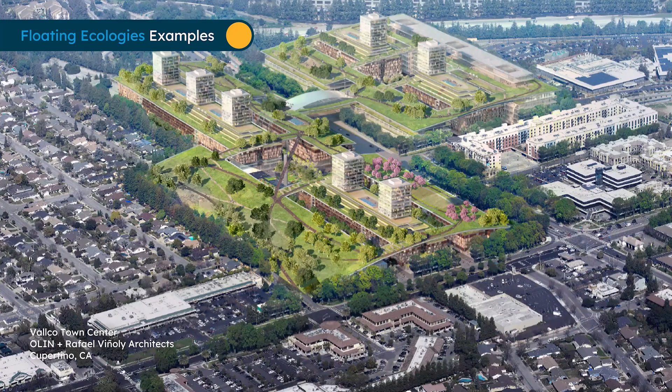And we're seeing this already in many major projects across the globe, for places like New York and the High Line, or large green roof proposals.

And huge urban greening and green corridor initiatives. And so naturally I thought, how do I do this with LandKit?

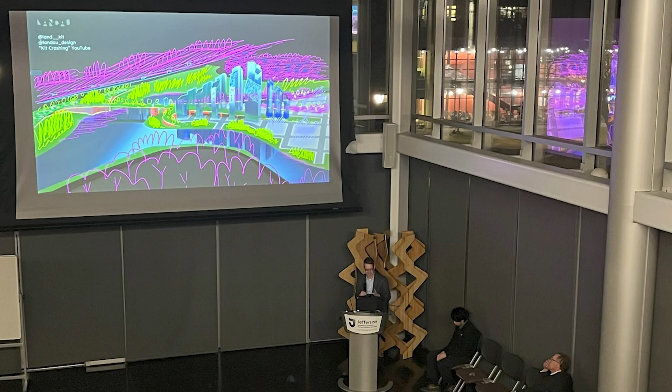And just as I was having that thought, I also was invited to give a lecture at Jefferson University, a very quick lecture, mind you, but I wanted to propose this idea as part of this panel that I was on with some esteemed architects. So anyways, that was really great, and I enjoyed meeting everyone.

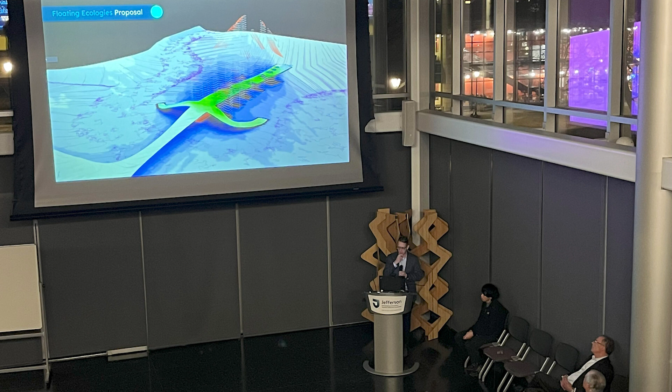But the proposal was something that I'm happy I did in place of just talking about our work. I hope you enjoyed the demo we give on floating ecologies and massing greening into urban areas.

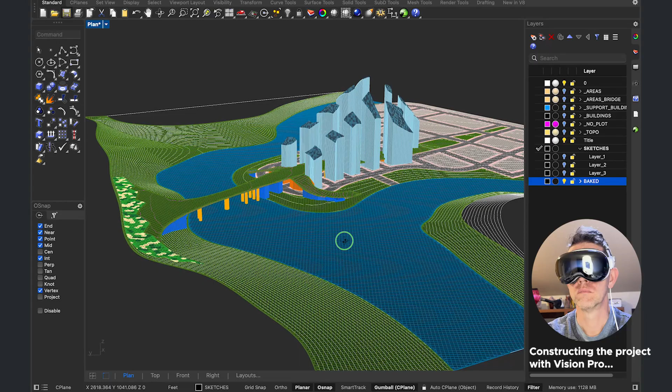This is an interesting example of a set of ideas that came out of a talk that I gave at Jefferson University a few weeks ago with the Council for Tall Buildings, with one of the partners of Moshe Safdie, Jaron. What I wanted to talk about was how do landscapes populate large cities?

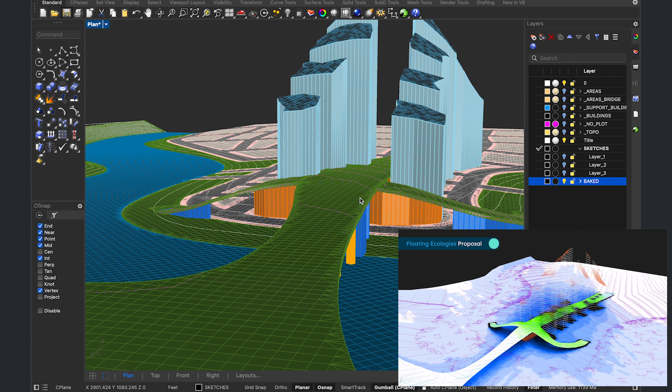I started thinking about how can we get decks of green flowing through the city in reasonable ways, and I wanted to spatialize that. The thesis is that we need this, obviously, because we need better and more ambitious green in our cities. How does that work? And if we're going to go taller with buildings, how do we go taller with landscapes?

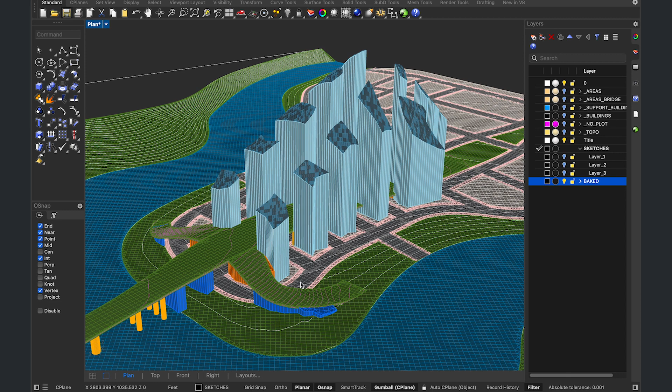That may be the right idea or not, but I had this idea or vision of how we could use LandKit to expand and build in this way.

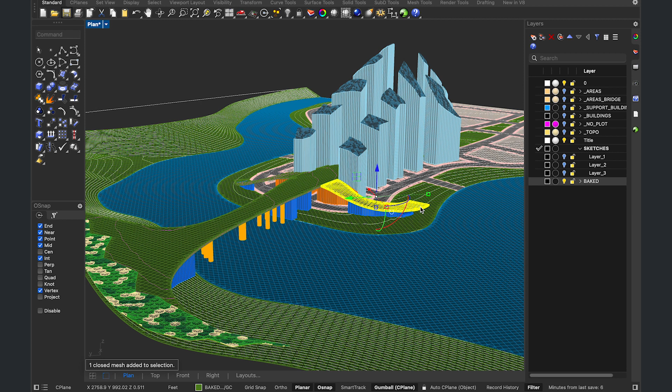So this is actually a baked version of the site. I have each element: this is the kind of green deck, these kind of green bridges that come down, and then these sort of supporting buildings.

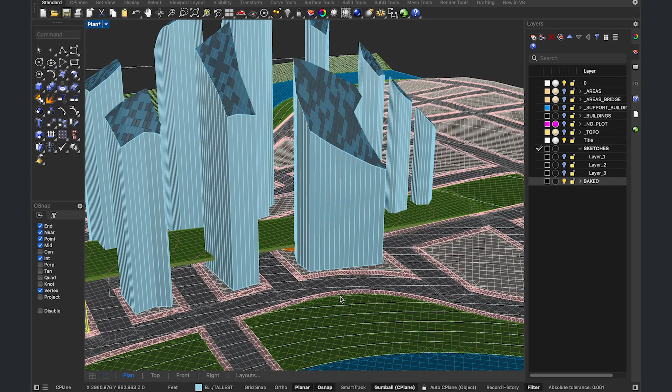We have our kind of garden of towers here that even in this case are kind of inside of the garden as a conceptual idea. But this whole city was an imagined thing that I put together.

So let me show you what we did with Grasshopper. If I swipe over here to the Grasshopper and I zoom out, believe it or not, this is the whole Grasshopper definition. So if I zoom in here, what do we have happening first?

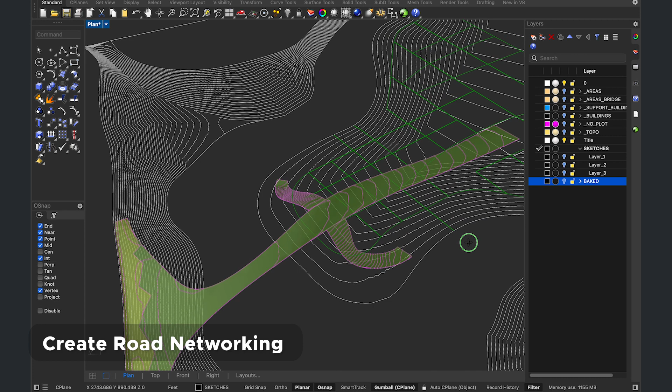First, we start with the roads. I created a road network using a set of line work you can see here, and that's under roads in no plot, I believe. If I select all these, I created a road network, and that road network is, again, just imagined.

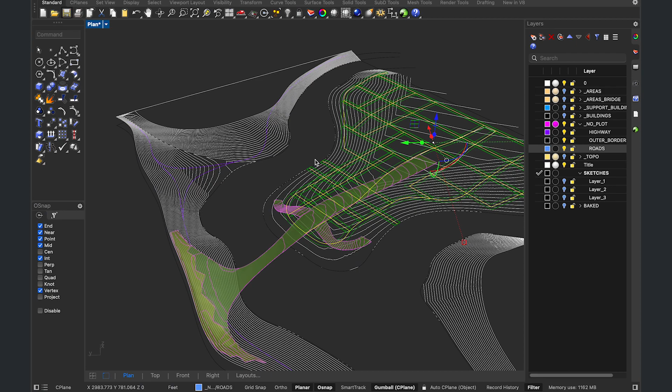But I was able to take those road networks and create pipes along them and intersect those with a plane. And if I preview that, we can see that there's a set of roads in the green there around the yellow that create a set of roads.

And then I randomly shifted them up and down for collaging purposes, which I've actually integrated this into LandKit, and we don't need this anymore. But whenever roads are all at the same exact level, this is going to kind of force the hand and make them at one level or the other.

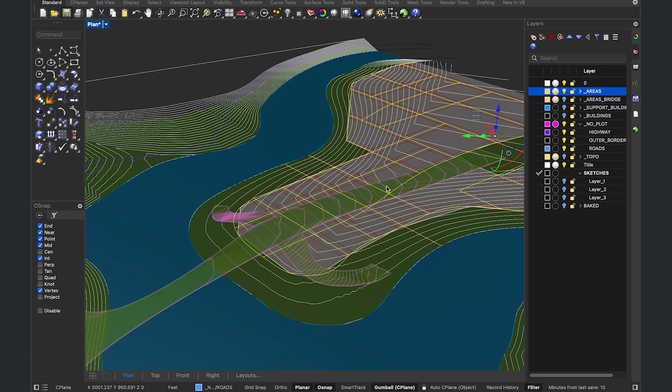The other thing I did was to take a set of other geometries, and let me show this. So under areas, if I preview those, these are all the underlying surfaces. And I'll just turn this off.

If I select all of these, select sublayer objects, you can see that I have my big green moves, my big gray, and water, just as again a conceptual model.

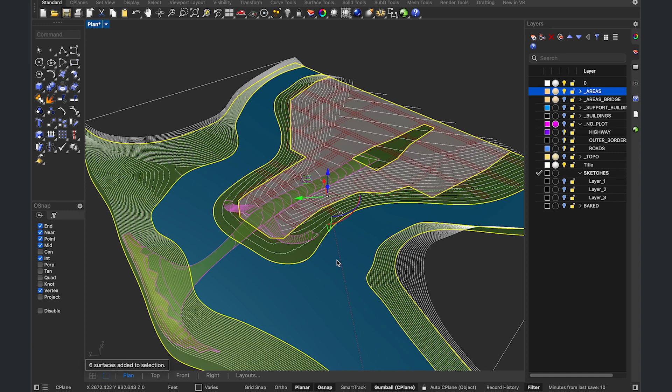But then all of the roads layer in on top of that, and the roads, if you'll notice, they're at a 2, and so they're slightly higher than everything here. And then I think I had sidewalks as well.

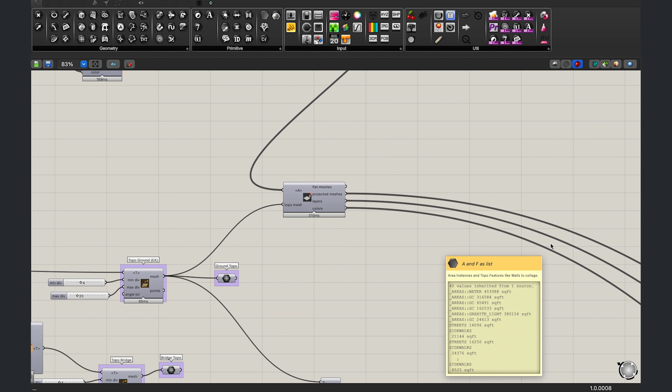So ultimately what you end up seeing from that, I can preview that. Let's actually just do a preview here. And I'm just going to preview these geometry surfaces and hide these areas. So you can see this is everything, and I'm going to turn off some of this.

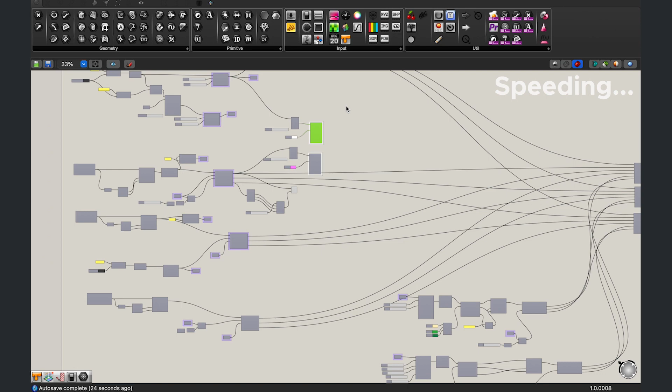There we go. You can see the road network and the sidewalks all layered in on top of these other things, which is kind of interesting because all I need to do in order to change a road is, well, first of all, turn on that layer and simply move that layer over like this, and suddenly it updates the layout of everything, or of all these trims and everything.

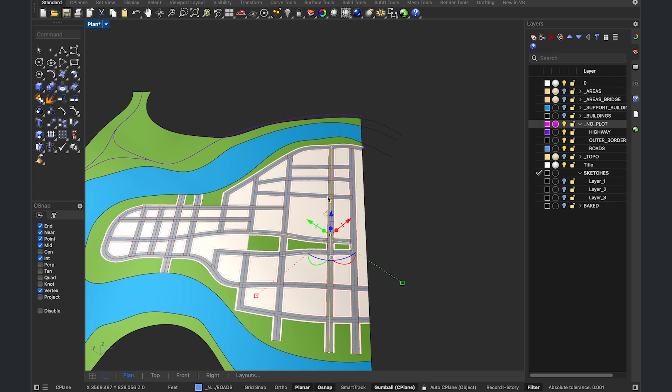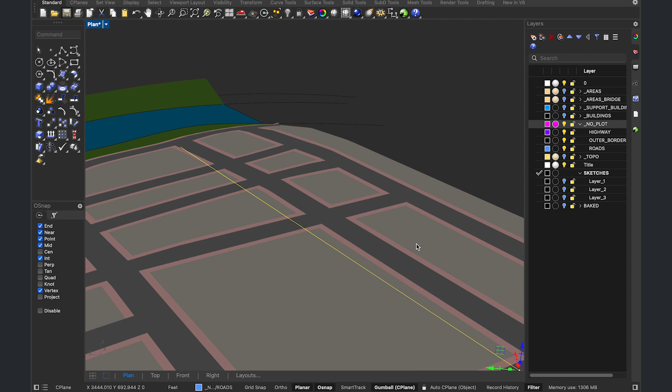The cool thing is that all of those trims are happening, and then it's also projecting them to the topography. So if I go back here and I hide this or delete it, and then I go over here to show everything previewing, those topographies or areas are projected to the topography.

Well, they're flat in terms of the terrain, and they don't have any thickness to them. But I do add thickness to these parts, the deck. So if I go in over here and I look at the bridge, so I create 2 topographies.

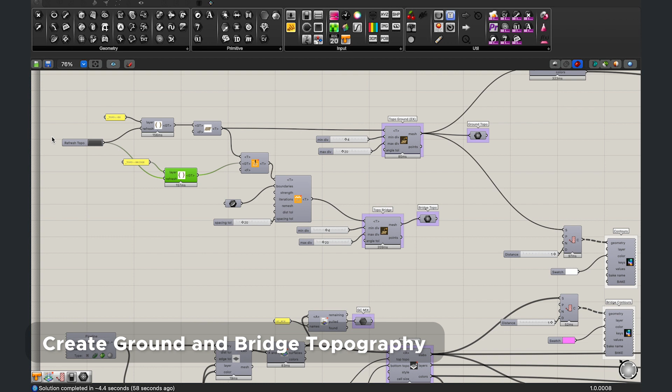I'm doing an existing topography, which is again all made up, and then a bridge topography. It looks like I patch in the bridge topography in the one instance and smooth that out. But then I use the bridge topography and the ground topography to then generate a thickened version.

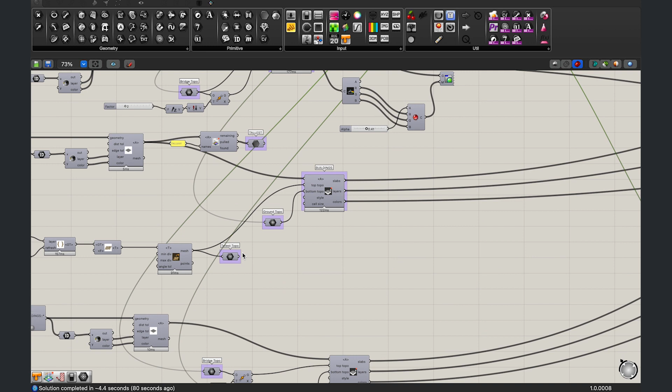There's a lot of weird stuff to preview here. Oh, there's the bridges, see them? Those are really just using the bridge topography and then shifting it down two feet in order to create the top and bottom.

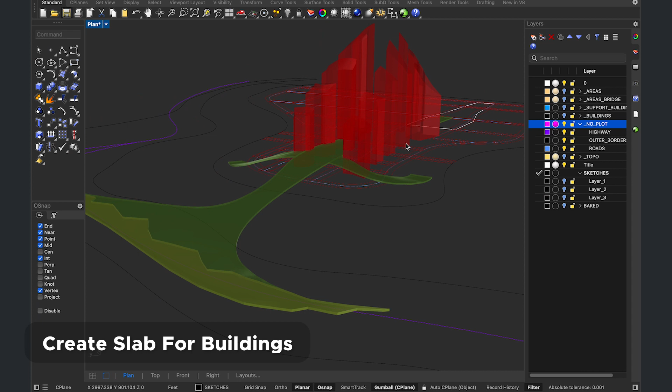Now, an interesting thing that we do is to actually create another topographic layer for the tallest, for the buildings. We are going to create slabs for the buildings that go down to the base topography and up to this top topography. So this is a little strange, but we're thinking of the tops of these buildings as a kind of topography.

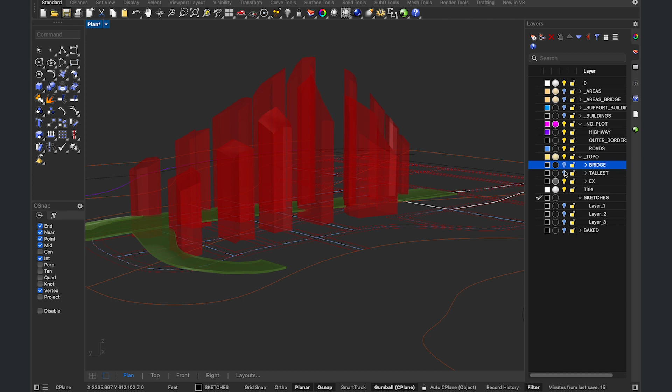So if I go over here and look at Topo, and I turn on the tallest Topo, we can see that I'm using a surface as my top topography to determine the height of those buildings. So if I turn that off, it's pretty cool.

And then you can see the bridge topography is being defined by these orange lines, which are break lines, and then we smooth those out quite a bit using the smooth tool.

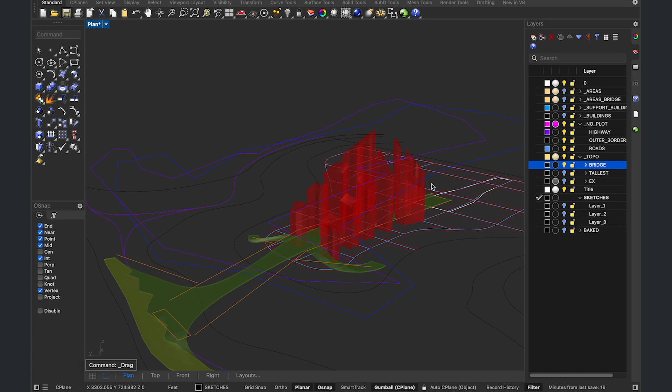Where is it? It's right here. So we patch the bridge into the existing, and then we smooth it out in order to create the bridge topography. Preview that.

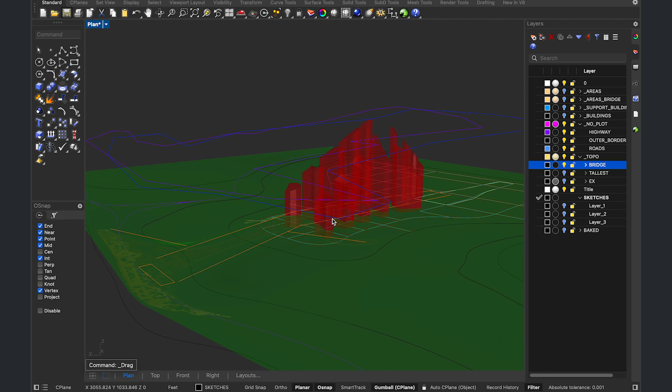So the bridge topography kind of floats up above the existing, but not all the way as high as the tops of the buildings. What else do we have here?

So we're trying to tie, let me turn on some of my contours. Where did they go? Here they are.

So I use the contours to cut through. The white ones are cutting through my existing grading on the ground, and then the pink contours are cutting through my bridge layer. So you can see how I've feathered the two topographies together by starting with the base topography and then patching this bridge in to the zone that I want.

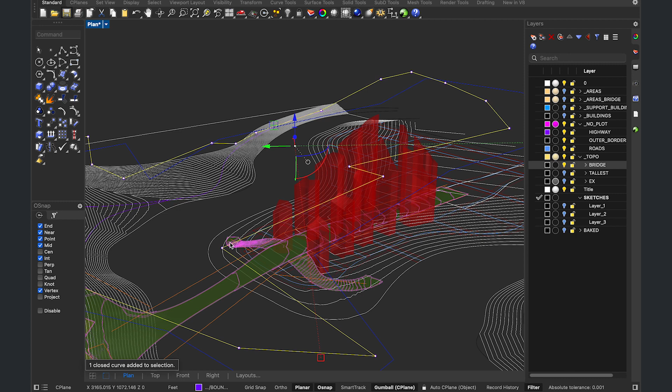This is actually the boundary. If I go to plan, I've used this boundary as the boundary to define where I'm actually making topographic changes for the bridge. And you can see here that there's where the cutoff is.

And then when I smooth it out, it does go a little beyond that boundary because the smoothing is not constrained by the boundary.

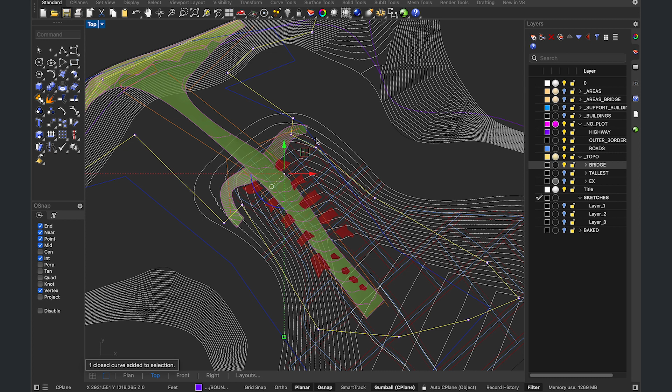And I have my funky shaped buildings here in plan. So the whole thing kind of looks like some sort of fish.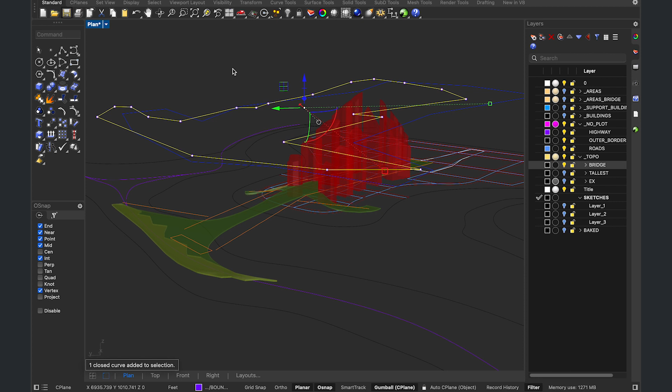Now, if I hide these again, it's actually kind of funny how few steps there are here. It's really the geometries that you have to set up and to sort of say, hey, okay, I'm thinking about this thing in a different way than just drawing a surface.

Yes, we're drawing a surface for the tops of the buildings, and that's fairly straightforward. But whenever we get into the existing, we have a bunch of break lines that we use to define a topography for that base topography.

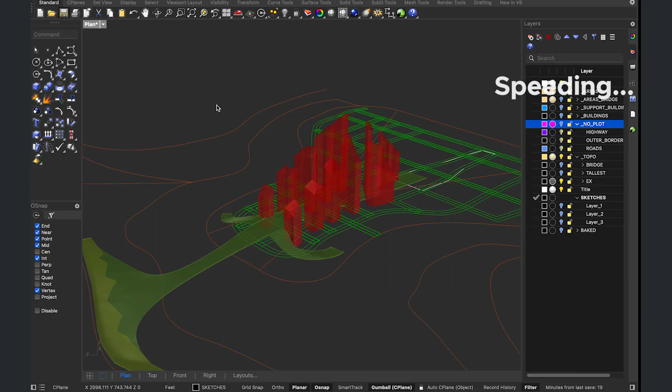I'm going to hide this road network. So here is just the break lines used for the ground, and then I have the bridge stuff kind of getting patched into that. And I forget what this blue, the blue is where I'm doing the smoothing.

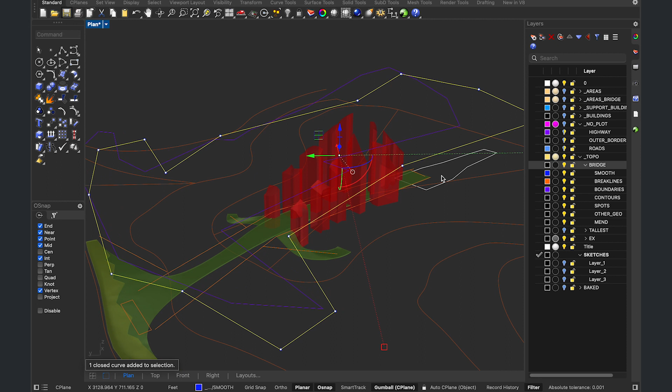So you can adjust where smoothing is happening versus where break lines are getting patched in. So there's a number of layers, and you can always turn these things on and off. But for any given kind of modification layer, you may want to sort of just look and have things coordinated. It's kind of an important thing.

And so those are my three main topographic moves in order to get the tops of my buildings, the top of this deck that's floating there, and my base topography.

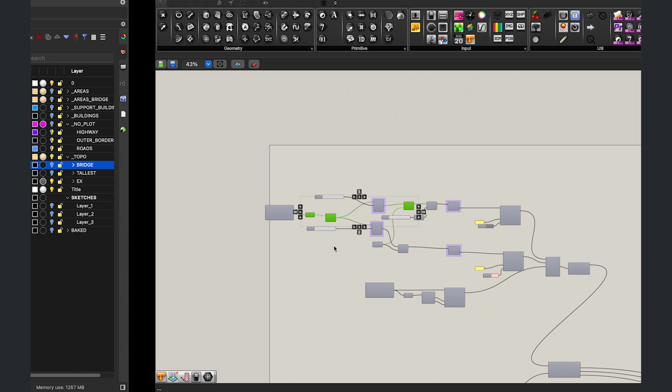Now, I'm going to show you one more thing, which is the support buildings. So if I preview those, the support buildings are all of these buildings here underneath my bridge. This is the thing that's going to support my green ribbon here.

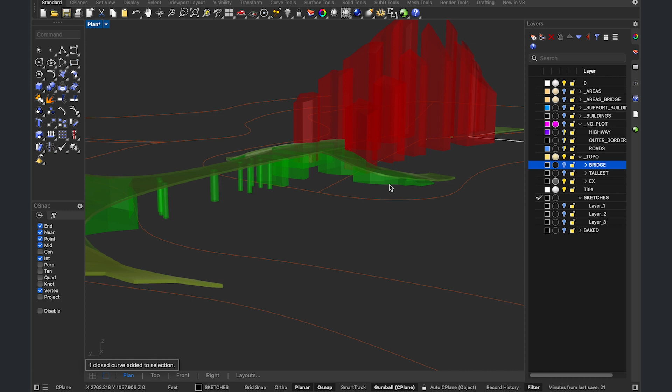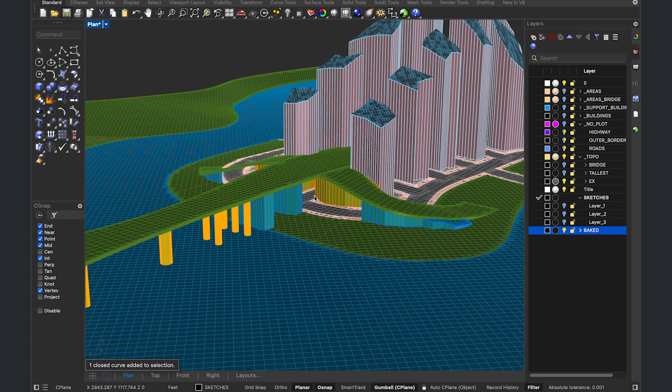I have three typologies whenever we preview here and show. Yeah, so there's the columns, there's these kind of glass buildings, and then there's these kind of core buildings, or maybe they're less glassy, a bit more operational, a bit more maybe even back of house kinds of buildings. Probably not at that kind of urban sort of center, but they just might be a different typology, and I wanted to show how we can show different typologies.

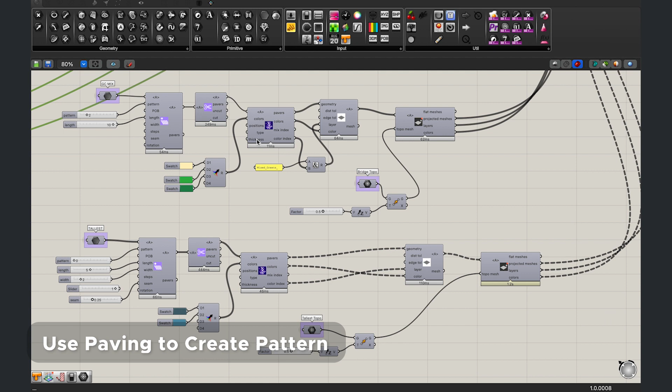Let me try the hiding view. Shaded preview. Okay, there we go. That's the normal operation.

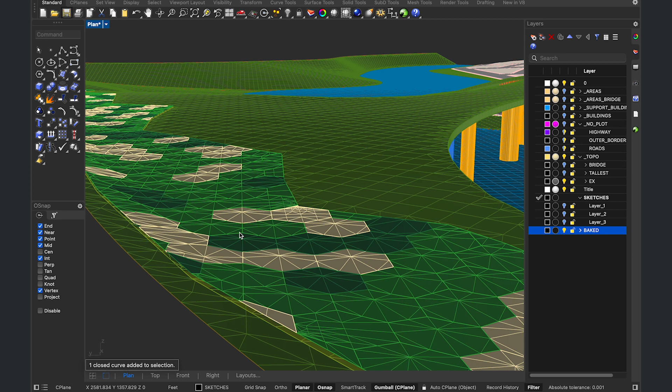The last thing was a little flourish, which was to add in some paving and some green kind of patchwork. So if we turn this on, I can see I'm using the paving tools to get a bunch of solar panels on the roofs, and then over here to get a bunch of kind of landscape typologies. Again, this is all very conceptual, but I wanted to show something a little bit more jazzy than just a bunch of solid massing.

So the way that works is all of these areas come in from a group of layers called areas bridge, and they have different layer names here. So then when they come in later on, I can say pull these areas by name. If I look at all of these, they have different names: areas bridge GC mix, areas bridge GC, etc.

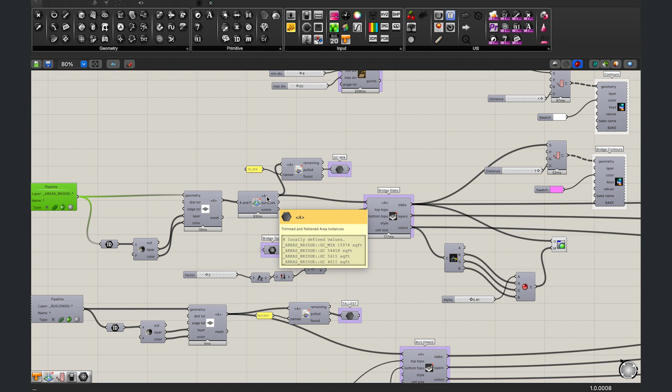It's actually the mix one that I want, and so I use the name GC mix to pull out just those areas that I want. If I follow this thread over here, I like to hide some threads in order to reduce the spaghetti. Over here, I am literally just pulling those areas out, or I guess it was just one area, and I begin to add paving to it.

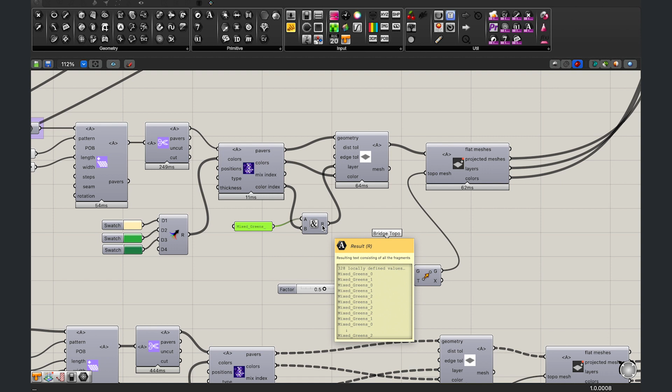I trim the pavers, and I apply a color mix using something that looks more landscapey than paving. I take the color index that's coming out, and I add mixed greens to it, and that way when it gets baked later, those go into 3 layers called mixed greens 0, mixed greens 1, mixed greens 2. You can see down here under baked, we have our mixed greens. So if I turn those on and off, those are there.

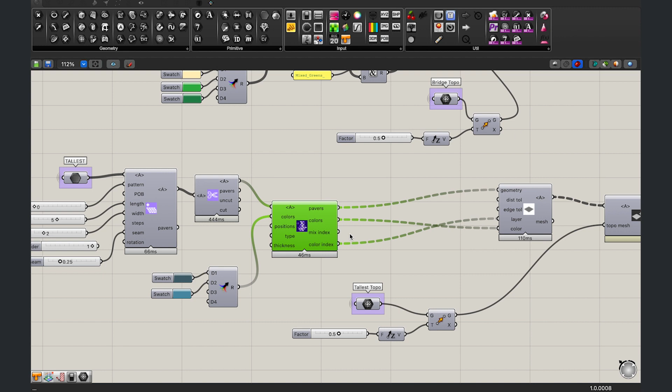Now I did a similar thing, almost exactly the same with these solar panels. So I pulled out the building tallest areas, and I paved those. I applied color, and then I projected those to that topo mesh.

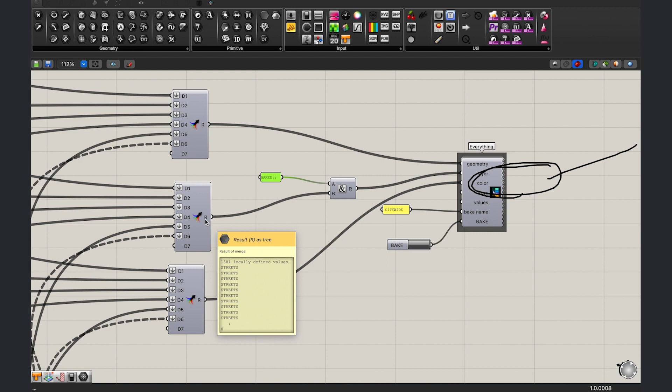And then all of these things that are getting exported, I basically took all of the geometries, all of the layer data, and all of the color data, and I added a baked name to all of the layer data, so that whatever the name of the area was, the layer that it's on, it's going to fall under baked, so that it doesn't land on these other layers.

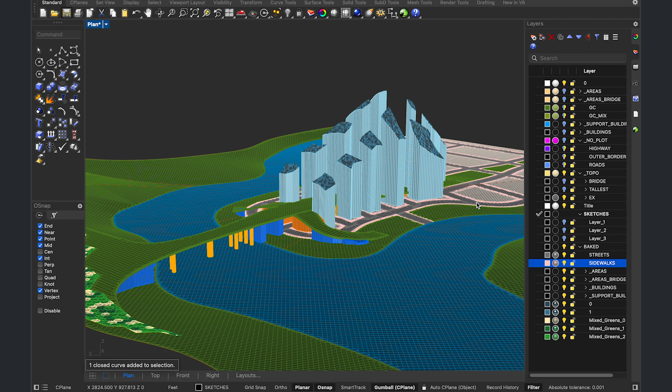So under here I have all these layers organized. I have my base areas, I have my bridge areas, I have my buildings, I have my support buildings, and then those solar panels, which it looks like I didn't bother to give a prefix, so they're just on layer 0 and 1, which is a little lazy. But for my example, in my lecture that I gave, it worked. And my streets and sidewalks, which I labeled independently because they weren't on the layers, they were being constructed computationally using the pipes and the intersections that I mentioned in the beginning.

That's pretty much it. But the really fun thing about this whole thing is you can change stuff at any point. So if I hide this baked layer and re-enable this preview, I can see the whole thing.

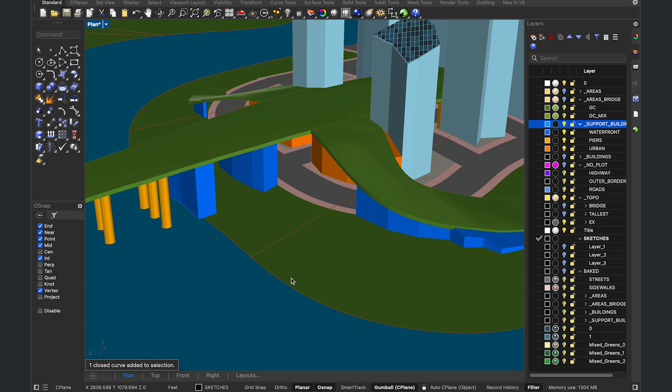If I go and look at my support buildings, for example, and zoom in here, I can just grab a curve and move this over here, and it literally just updated that building, the whole building connected to that thing.

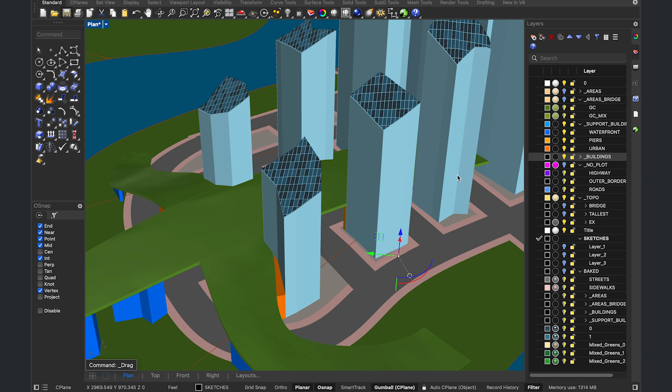I could do this similar thing with my tallest buildings and move this over. It updates the building massing, but also the solar panels on top. Yeah, so it's pretty nice because I can always change things later.

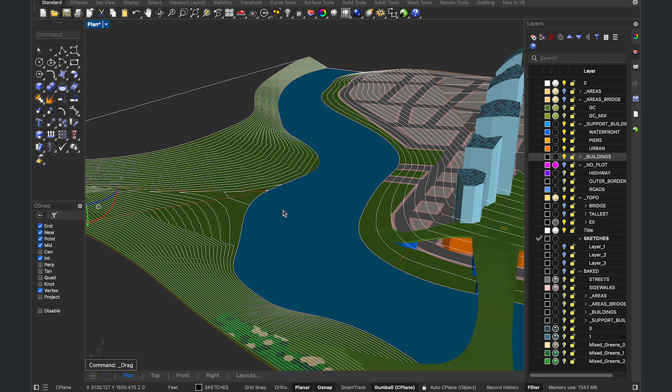Let me just turn on my contours again real quick, preview. And I can change grading. I changed the grading, and this is one place where I have it set up so that it's not automatically going to resolve everything. You sort of have to go here, and I have a refresh topo button set up in order to refresh the topo. So you click that, it's going to refresh and reproject everything, and it was that fast.

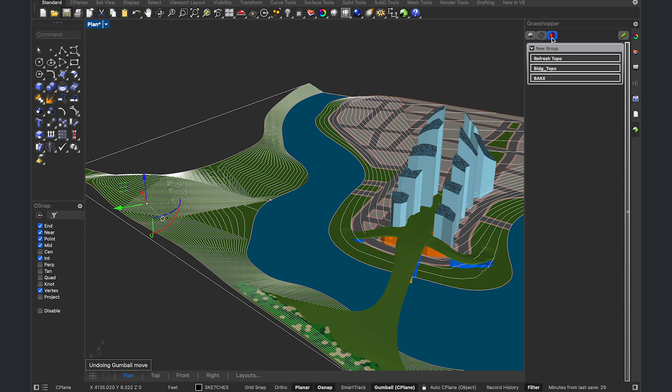So if I move this way up and just refresh again, just so you can see as a demonstration, boom, it's done. That is how the Grasshopper and the whole setup worked.

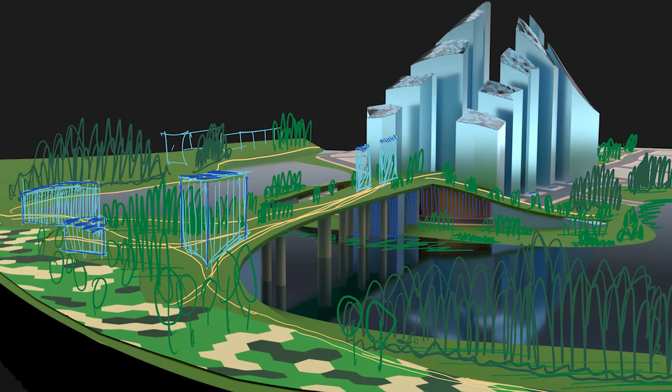I think it was an interesting lecture. I was able to share some thoughts about how landscape integrates into a larger urban environment. I was able to test out how we can do massing using LandKit at an urban scale, which was not really something I had thought that much about before. And that includes buildings, and that includes these different layers.

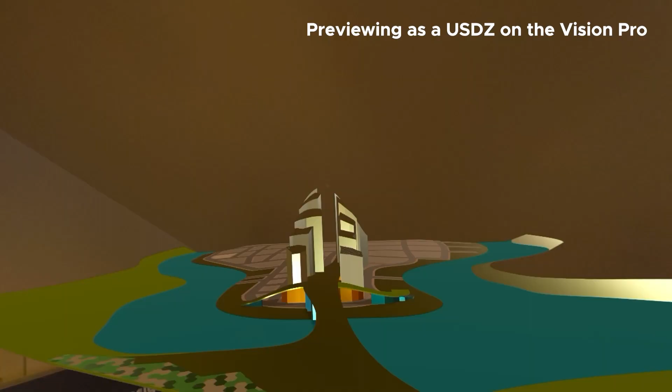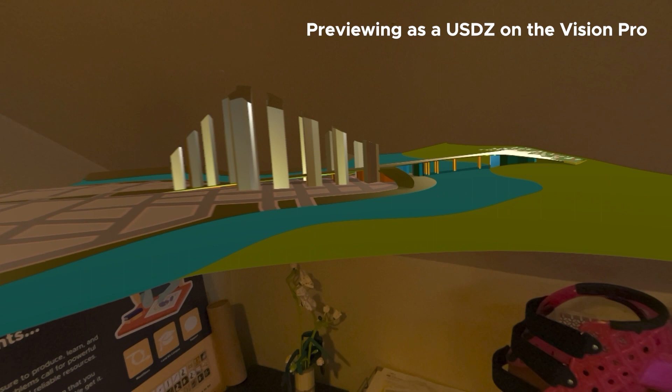Finally, I got to test this out using a USDZ file that I exported from Rhino 8 and was able to look at on the Vision Pro. One thing I found similar to the Dragon demo we did a couple weeks ago was to use metallic materials in order to really see that in that environment.

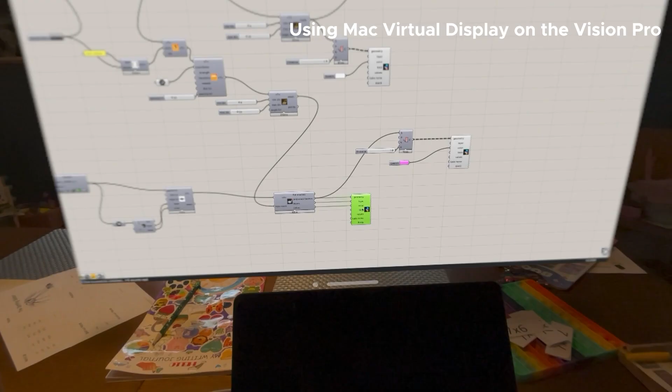And so I'm experimenting with those materials. They seem to work the best as a simple translation of apply and export, and not having to apply too many different textures to overcomplicate things.

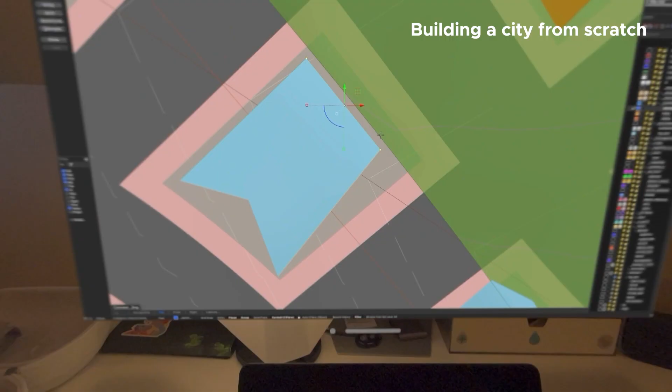Well, that's floating ecologies, and I hope you enjoyed.